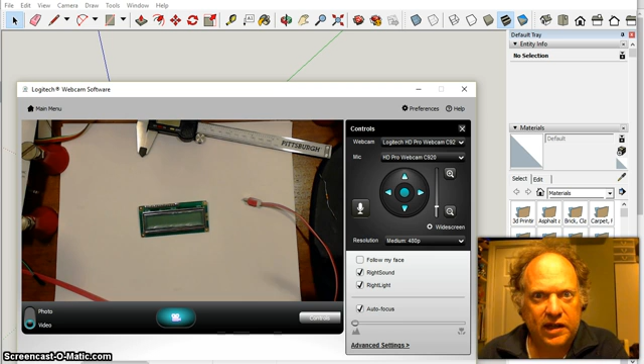We were just doing this thing with the LCD, and I'm not much of an artist, but what I want is something I can use sort of universally.

A little platform here that'll hold the LCD. I've got all these pins here, so I'm going to make a cutout like that, probably with nice curved edges. From a side view, I'm picturing something not very thick, with a piece that comes down with a hole in it, so I can mount it on some sort of pivot.

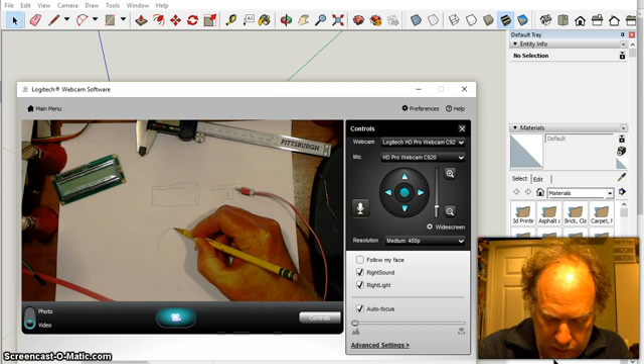And to make it sort of universal for my robot, I'm picturing something like a wishbone, something like this. Yeah, I told you I'm not a very good artist.

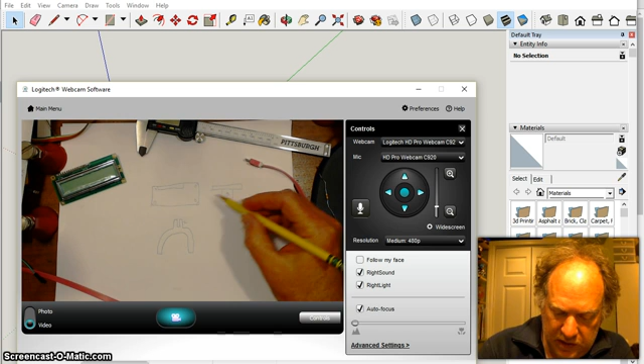And something that'll span over the electronics, or maybe a battery pack, coming up like this. And then this gets slotted with a hole through there, so that this piece sits inside of here. I can tighten it up and set the angle any way that I want.

So that's what I'm going to try to draw, and I'm going to try to do the whole thing here in my less than 15-minute goal. So let's take a look.

Here's SketchUp. Let's see if I can show you here — preferences and template. I like to use woodworking millimeters, since a lot of stuff gets published in millimeters.

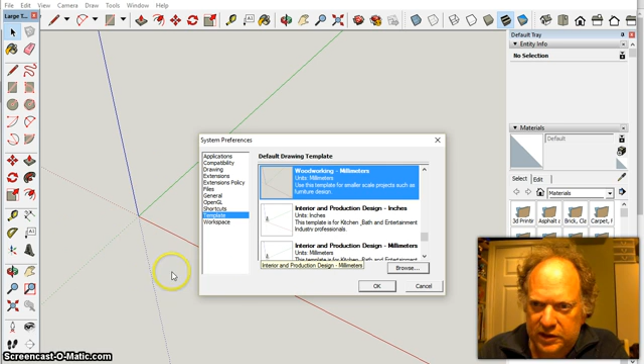I'm a science guy, so everything we do is in the metric system. It's kind of natural for me. But when you download a piece of electronics or something, almost always it's in millimeters. So let's just go with that.

And if you don't have one yet, let me go back to this camera — you should get one of these. They're really nice for making measurements. It's going to make your life so much easier.

They're pretty cheap. In fact, let me show you here — if you go to Harbor Freight, it's 20 bucks, sort of the regular price. If you live near one, they always have them in stock, and there's almost always a 20% off coupon. A lot of times these things are on sale for like 15 bucks. So I would recommend getting one of these.

I wouldn't swear by this — I wouldn't rebuild the engine of your car with it — but for measuring the distance between holes and whatever else, I think they're actually pretty good.

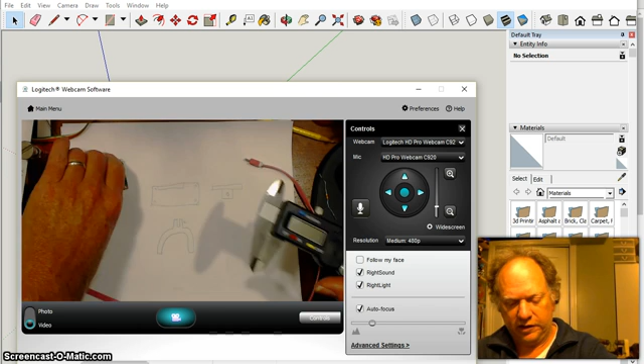So let's go back now to SketchUp. Actually, let's go back over here and make a rough idea of how big we want this thing to be. I'm going to turn this on. I want a little room to grow in case I want to put other things in there. Let's go with 90 — we're going to make it 90 millimeters.

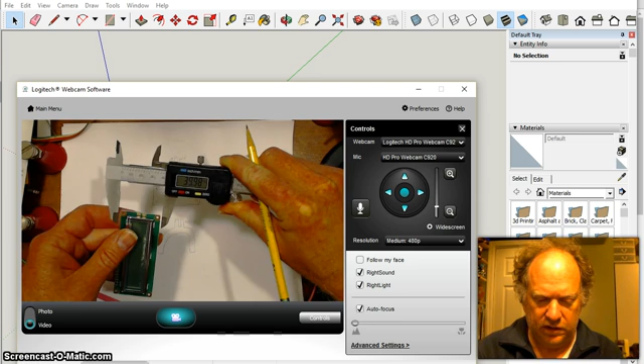And then let's make it, I'll get this up here so you can all see it — I'll say 40. Gives us some room to play. By 40.

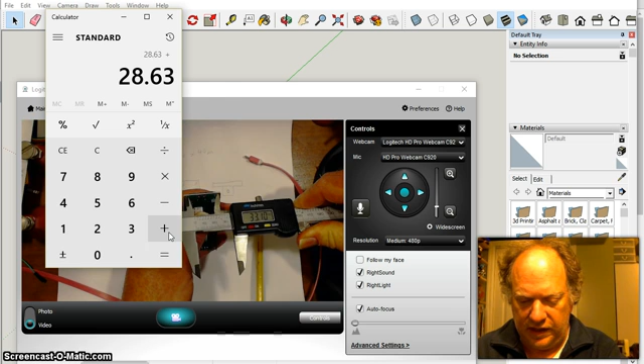And so let's find the distance between these holes. If I use the caliper like this, I get 28.63. Let's open up a calculator. 28.63 plus — let me move this over here so you can see what I'm doing. I'm now going to take the outside measurement; first I measured the inside, now the outside, and we find it to be 33.5. 33.5 divided by 2 — we find that the holes are basically about 31 millimeters.

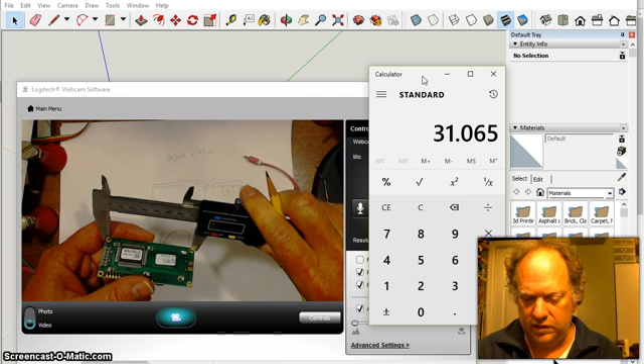And let's do the same thing on these. I'm going to measure the inside: it's 72.6. Let's clear that — 72.6. I'm going to make the holes a little oversized, so it's not going to matter too much; we'll be in the ballpark. And 77.6, and we find that this is about 75 millimeters. Okay, I think we got all the measurements we need.

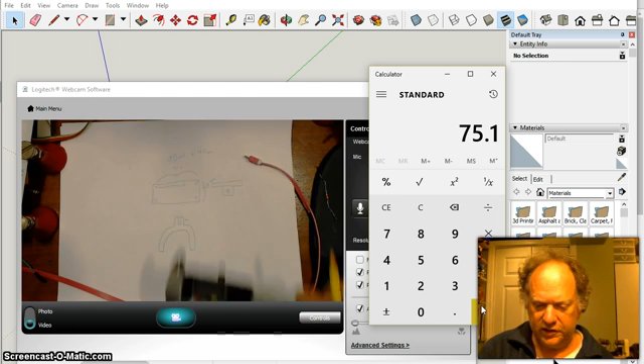Let's get this thing knocked out here in the next 10 minutes or less. Okay, so here we are in SketchUp. I said I want something that's 90 millimeters by 40 millimeters as my basic piece.

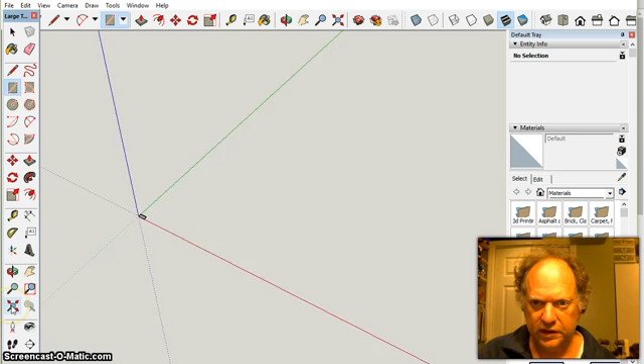So I'm going to start with a rectangle tool. I'm going to roughly throw something out, using my keyboard to type in 90, 40 — it shrinks down to an itty bitty bit, and I'm going to zoom on extents and use this tool to kind of rearrange it so we can see it.

There's our overall piece. I always find it easiest in the long run to reverse its faces right away. My printer doesn't like it if it's not reversed, so make sure everything's white.

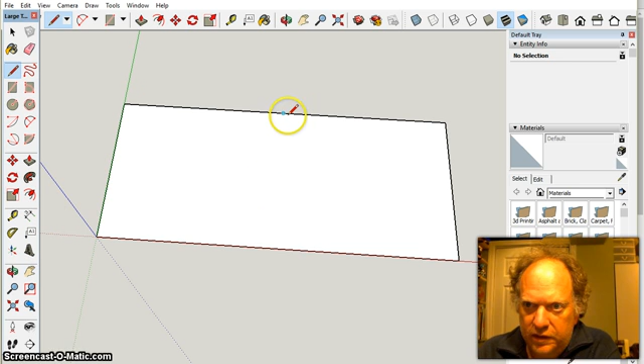Let's start taking — there's probably better ways to do this, I'm just going to show you the way I do it. I like to find myself some axes, which I'm going to erase eventually. So I'm going to the midpoints here.

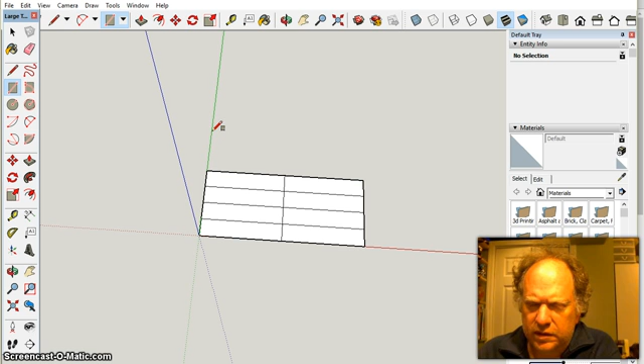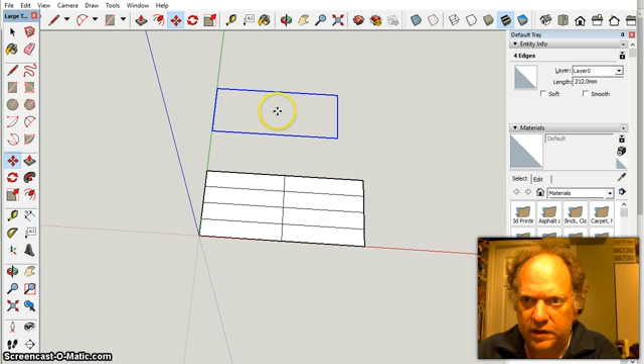Let's zoom out a bit. I'm going to make another rectangle right here, and make it the size of the holes we needed, which are 75 and 31. Now I'm going to delete the inner part, select this, and take it from the center and move it to the center. So now I know where those holes go.

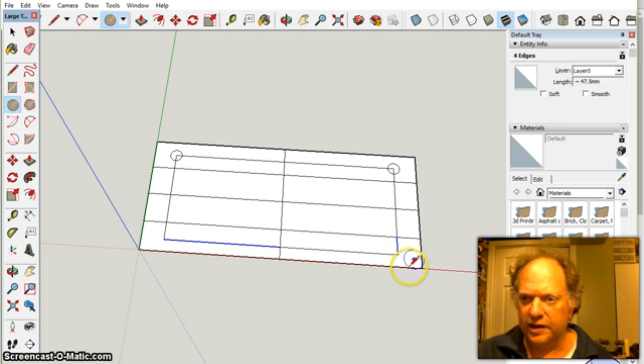Let's zoom back in. I'm going to put some holes in here. I want them to be through holes, since I'm setting screws all the way through, so I'll go with a 2 millimeter hole. I can make any size hole I want, then type 2, and it makes a radius of 2 millimeters. Enter. Now I've got those mounting holes in here, which is awesome.

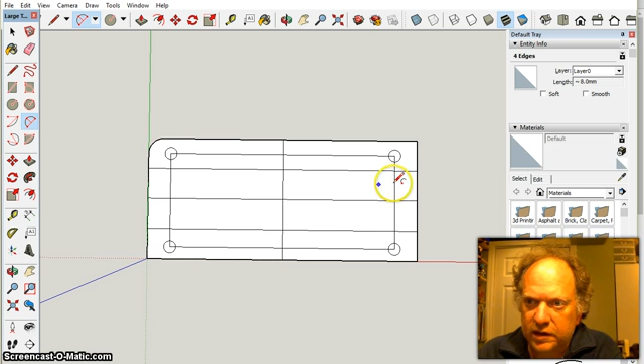Next I like to make my corners chamfered a little bit, to give nice smooth edges. I'm going to go to the midpoint, go till it turns pink, tangent on a line, double click, and now midpoint. This is why I put these long lines in here, to give me reference points. If I was really designing something important I'd have exact measurements, but I'm just looking for aesthetically pleasing.

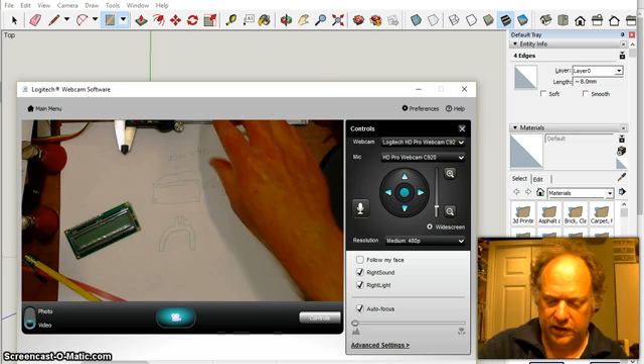Okay, we are getting there fast. Now we need to make that piece that's going to stick up, that's going to have the hole in it, for the pivot. Let's jump back here. I'm thinking it should probably be about that wide and about that tall. It seems about right, so let's go 15 millimeters tall, 15 millimeters wide.

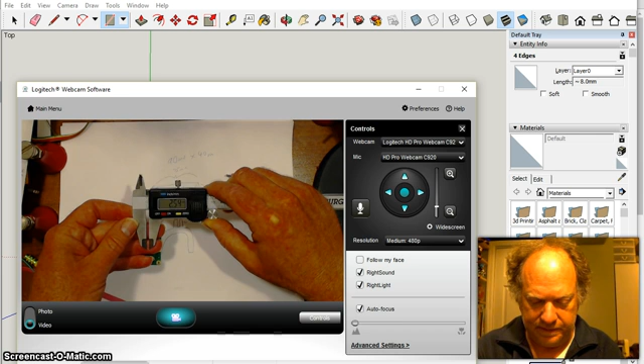For the thickness, I think 3 millimeters looks pretty reasonable. It's just going to have a screw through it with a pivot, so let's make it 3 millimeters by 15 millimeters. Let's jump back over here.

I'm going to want to put it right in the center, so I'm going to dab this thing here, and actually make it... come on, give me this piece here. What's going on? Hold on, I probably chose wrong, let's get this back.

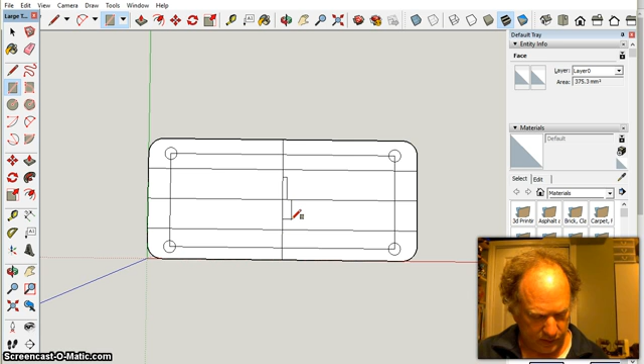There we go. I'm going to make this quarter of it be half of 15, so 7.5, comma, 1.5. Now I've made a quarter of it. I'm going to do that down here too: 7.5, comma, 1.5. You'll see why in just a moment. And this one I'll make 15, comma, 1.5. Now I have this piece here.

I can start erasing stuff, get rid of all my reference lines, get rid of all this junk. Oh, we're at 10 minutes and I still don't have a part. Let's see if I can finish this.

I should have paused it when I was erasing. Oh shoot, we need to put the little cutout. If this is the bottom we're looking at right here, that means I need to make the cutout over here on this side. I'm not going to spend a lot of time on this, I'll just make it fairly good size. It doesn't really matter, but we'll try to make it symmetrical.

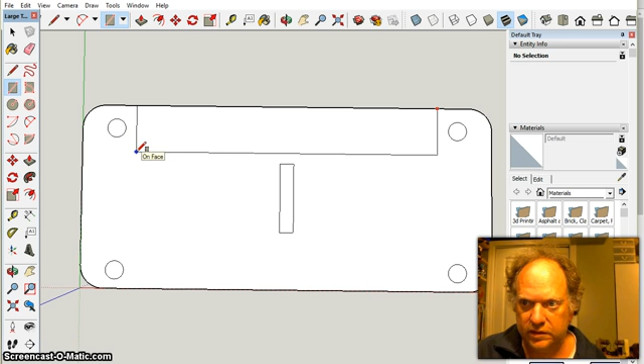Actually, I'm going to get closer to the hole. I want it right about there. And then we're going to go symmetrical, like that. Okay cool, I think we've got the basic idea down.

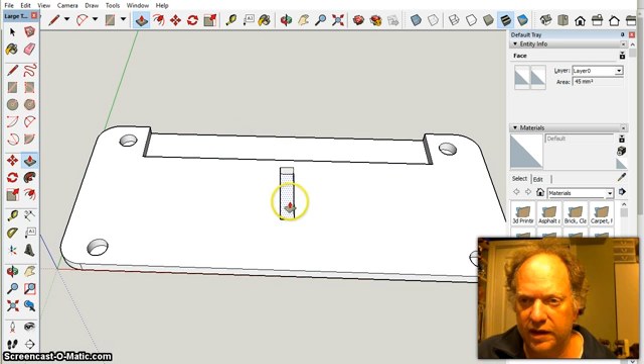Now let's give ourselves a little bit of a spin. My printer, I'm going to print this thing at 0.3 millimeters, so the best thing to do is keep all your work in increments divisible by 0.3. I'm going to raise this up to 2.1 millimeters, and this guy I'll raise up 15 millimeters. Now I've almost certainly got some mess down here I have to straighten up.

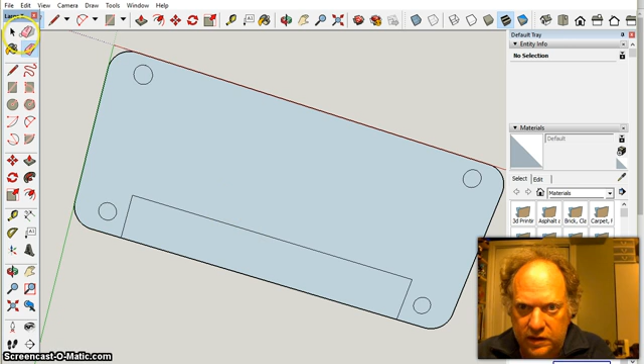It's hollow, not a problem. We're going to go from here to here and just draw a line, and that sort of fills it all in. Now I can erase all these lines, take this and delete it, that and delete it, and delete that. Then I'm going to reverse this face, because remember I want everything to be white. Oh, I got a funkiness here, let's get rid of that. There we go.

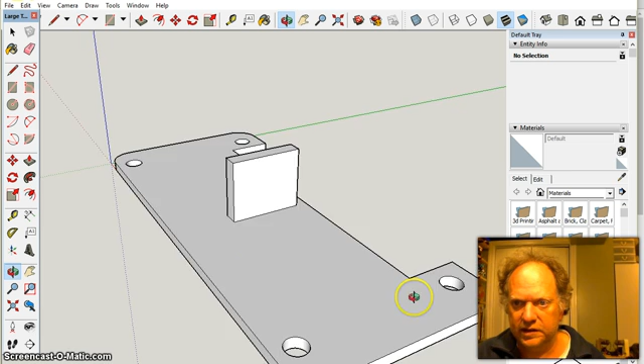Let's spin her back around. Now let's deal with this. I'm going to do my reference line thing again, midpoint to midpoint, midpoint to midpoint. I think I'm going to put my hole up here. I'm going to make it 2 millimeters again so I can put a screw through it. And let's make it pretty.

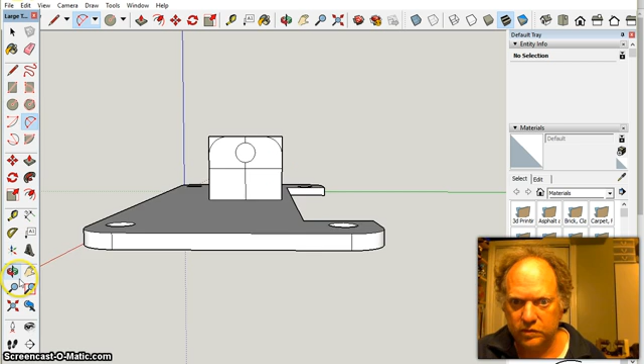I'm going to take this tool here. Wait, actually I'm going to get rid of that. I'm going to delete this chunk here, that, and that. And now I'm going to take this and go to the tangent, and go to the tangent. Actually, we have to do that on this side. Again, I'm going to put a reference line down, midpoint to midpoint, and here to the tangent, here to the tangent.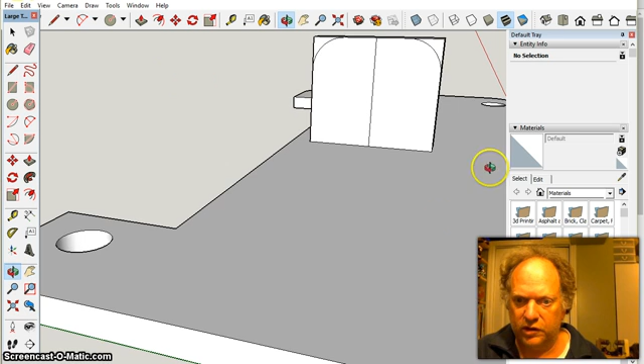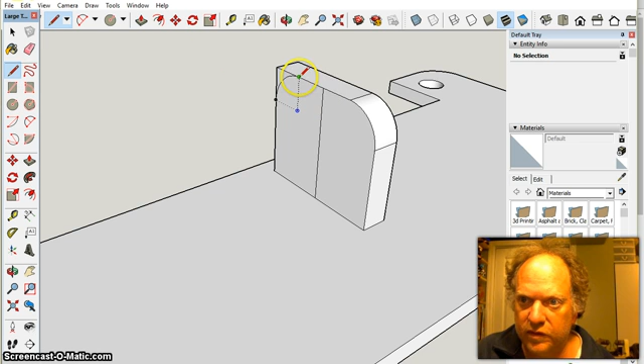Now I need to draw a couple other lines. I need to go to the endpoint, endpoint, and endpoint, endpoint. Now I can take this guy and shove this over. That's nice. And now let's draw another line here from the endpoint, endpoint, spin it. Endpoint to endpoint, and let's push this guy away.

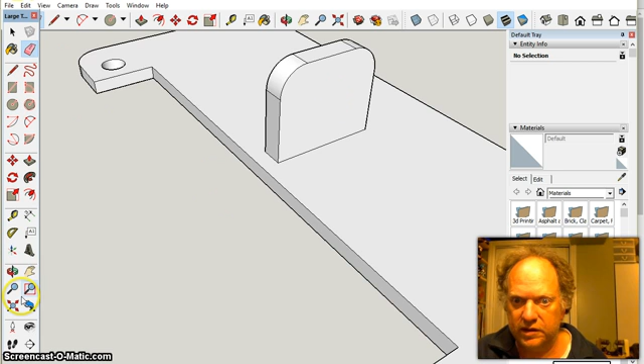Excellent, we are nearly done. Erase our reference line, spin this guy around, get rid of these reference lines. Oh no, 10 seconds, darn. And push it through 3 millimeters.